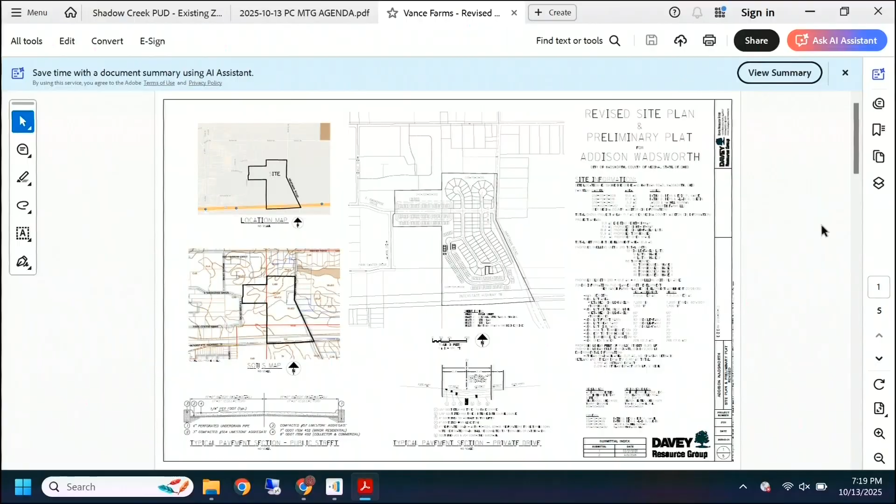The properties this is built on, most of them were in Wadsworth Township. That annexation has already occurred. Part of the property was already in the city. So this entire area was rezoned to Vance Farms PUD.

Action on the general development plan was tabled, as there were some issues that needed to be addressed, mainly with public utility extensions, routing and oversizing of various utilities, water line in particular, as well as improvements to the intersection of Smokerise Drive and Hartman Road. Those have since been addressed.

So just going over the general plan briefly, the project consists of 280 total dwelling sites, 92 single-family fee simple lots, 188 townhomes. All fee simple lots are greater than 7,800 square feet, which exceeds the minimum lot area specified in the pre-annexation agreement.

Overall project density is roughly 4.5 units an acre, less than the maximum 7 units an acre as outlined in the pre-annexation agreement. We've got about 28% of the site, or close to 18 acres, that will be common open space.

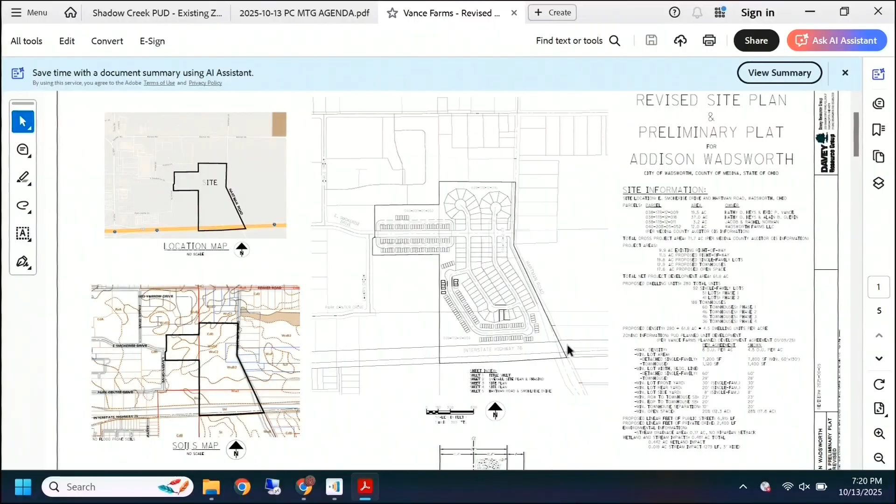Most of the streets will be built to public standards. There are 2 private drives that flank either side of Smokerise Drive Extension.

They're identified as private streets AA and BB. Those will provide access to the townhome units that are located in that particular vicinity.

So the general plan is very similar, if not identical, to the pre-annexation development plan. All proposed uses, densities, and open space requirements do comply with the PUD and the pre-annexation agreement.

So there were a couple of issues I'll bring up, but some have since been addressed. One question: the building envelopes for the townhouse units are roughly 30 by 50. Just need some clarification—do those represent the outer edges of the buildings, or will there be some yard area incorporated? For instance, the building might be 30 by 30 and have a 20-foot rear yard.

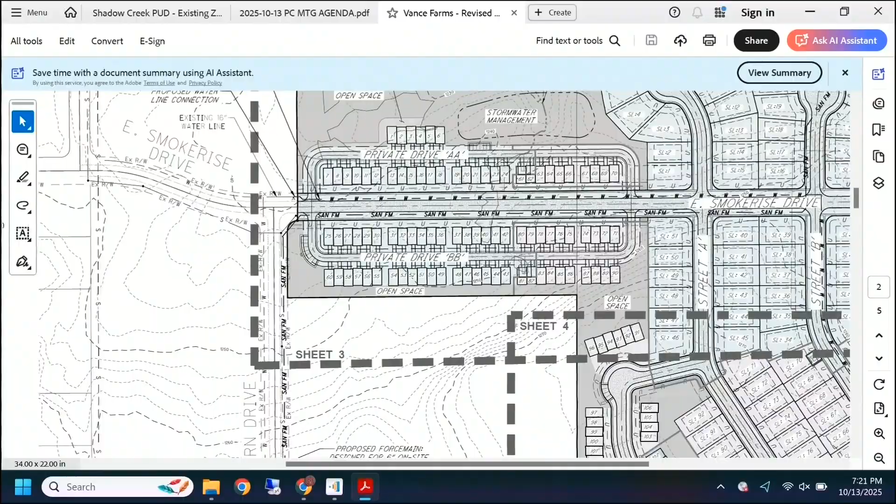Also, the townhouses, I think it was 7 through 42 and 61 through 90, flank either side of Smokerise Drive. My question was, are the fronts of those townhouses going to face Smokerise Drive, or would they be the rear of the buildings? I spoke to the applicant this morning.

They don't have a product where you can have a rear entry garage, so the rear of those units would face Smokerise Drive. I think it will need to go to the Architectural Design Committee for their review, to see what those rear walls look like. We'll also need to install some additional landscaping that the ADC will have to approve, to kind of soften that view. But I just found that out this morning.

Sanitary sewer, okay. The property slopes away to the northeast. There will be a lift station constructed. I think that was on page 3 of 5. Actually, it shows up here. You can see the pump station here in the northeast corner. That's going to route everything back down to a force main in Smoke Rise, and it will eventually connect to the gravity sewer in Laverne.

The force main is going to be oversized from 6 to 8 inches. The city engineer states that the oversizing is really not required by the city, so it's not subject to be reimbursed. Public water, on the other hand, a little different matter.

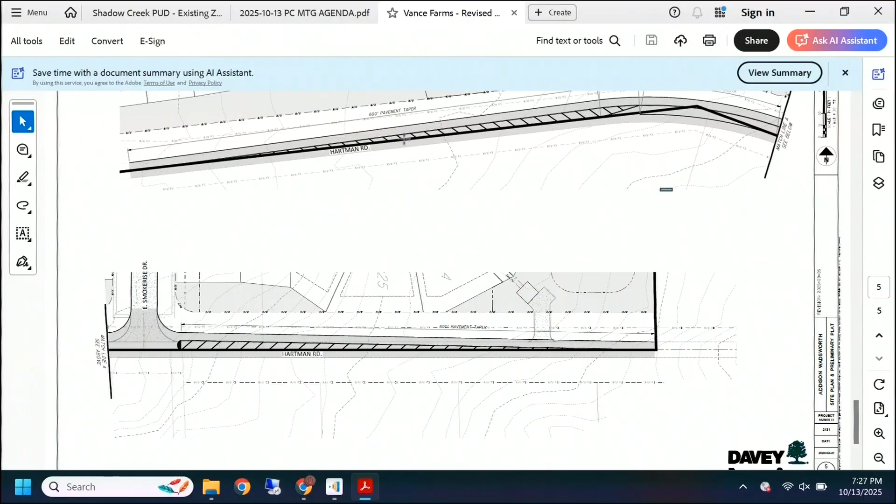The one that's further off-site to the west at Hinkle and Smoke Rise will be funded through some of the TIF agreements. Within the subdivision itself, there's some geometries here, I think it was on Street C. You can see we've got some bump outs and some tight turning elbows. Our engineering department indicated those might need to be reworked a little bit to make minimum turning radii, just to smooth out the traffic flow.

Also in terms, there are two cul-de-sacs here, neither of which require any variances. They're both less than 500 feet. I think I've noticed that certain traffic improvements and water improvements are eligible for reimbursement from the city.

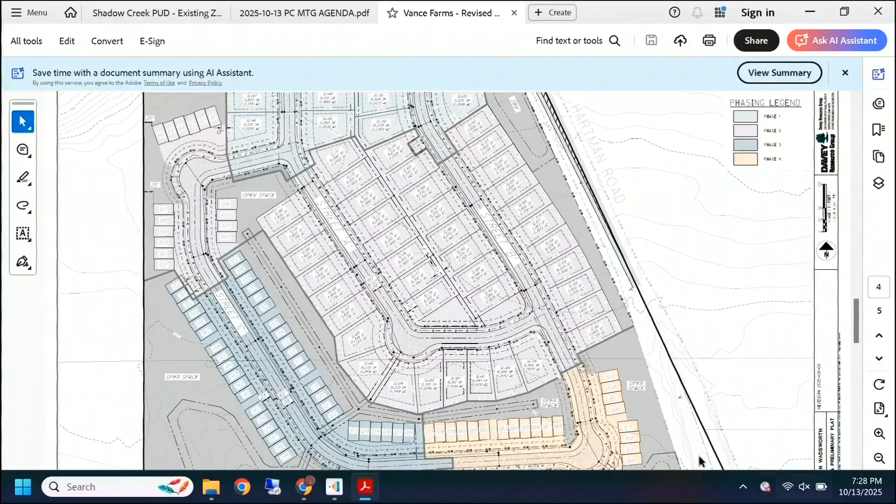In terms of the water line, again, coming in from the southwest, and instead of traveling up Hartman Road, it's going to cut into the development and come up Street B, where it then will tie into another 16-inch water line extension coming from Laverne Drive to the west. So it does complete a major water loop within the city's water system.

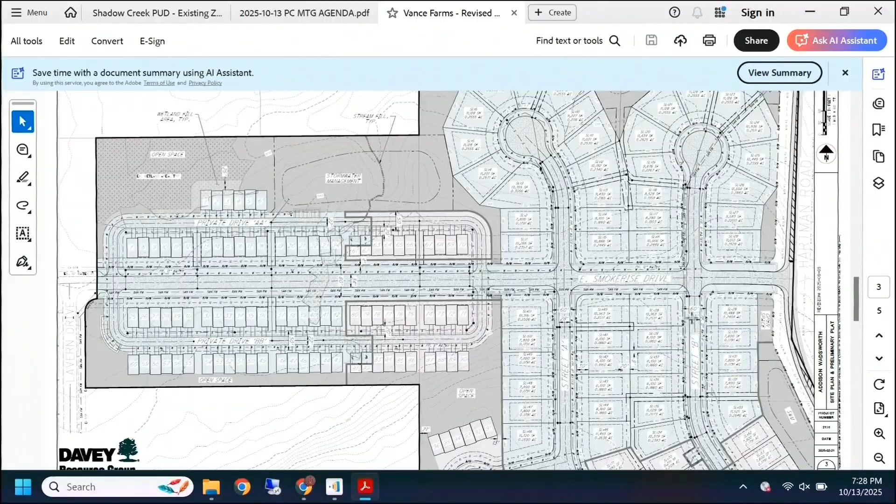And the reason they chose coming up Street B is, one, to keep from overburdening the developer with redundant expenses. If we took that 16-inch main up Hartman, they would have had to still build an 8-inch water line on Street B.

The lands in the township are already developed, so they're not going to be tying into the water. If they need to, they can easily do another stub that ties into Smoke Rise. It was felt it was more cost effective, more efficient, and less maintenance expense for the city in the long run by not having to maintain water lines that really are parallel - one on Hartman, which will rarely be tapped, and the one on Street B. So that one on Street B was oversized.

Oil and gas wells - I'm not sure how many are here on the property, but those will be abandoned and capped per ODNR requirements.

Also, a little clarification: there are some abandoned mines that impact this site. I believe a subsurface investigation was conducted. However, the potential builder who's going to buy these lots from the developers is going to have a full-blown geotech study done. Right now, the net results are that those mines are far enough down, they do not anticipate any issues. However, a full report will be turned in with their civil plan reviews. Like we'll be talking about in cases that involve underground mines - in fact, Briarthorn has some that they had to do mitigation to - there will be certain recommendations for disclosing the mine study and the fact that there are mines in the area, but referencing the geotech report as part of the HOA documents or as a freestanding document, so that any purchaser is given fair notice. Then it's really up to them whether they want to take a risk or not. So again, that issue is fairly well addressed.

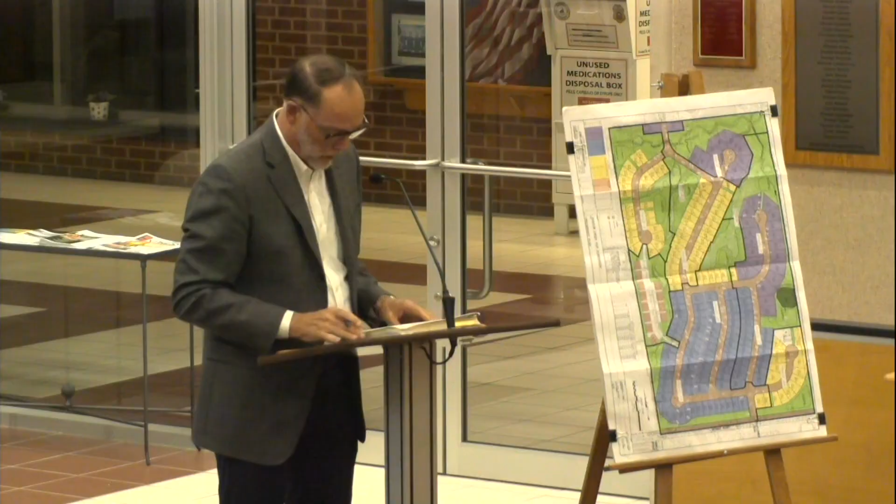I did want to make a couple of quick minor corrections. I did make an error on our application, as Jeff noted in his notes to you, and the net density is 2.92 units per acre, and that's what's shown on the plan. It's just dyslexic or something.

Also, the homes in yellow will be age-targeted, not age-restricted, but the requirements will be that they have a first floor master and that maintenance is included. So essentially that eliminates a lot of rigmarole with having basketball hoops and all that kind of stuff. Those homes will be primarily targeted towards people that want a maintenance-free or limited-maintenance lifestyle. The blue, as Jeff said, is more of a smaller single-family lot, and then the purple are the larger estate lots, which we've situated close to the common area or open space to maximize the value of those lots and also to follow that zoning hierarchy.

So what that means practically is there'll be a master association for the maintenance of the overall common space and stormwater ponds and stuff like that. But there will be sub-associations, and those sub-associations for the cluster homes will then be responsible for mowing the grass and plowing the snow and stuff like that. So just a quick clarification on that.

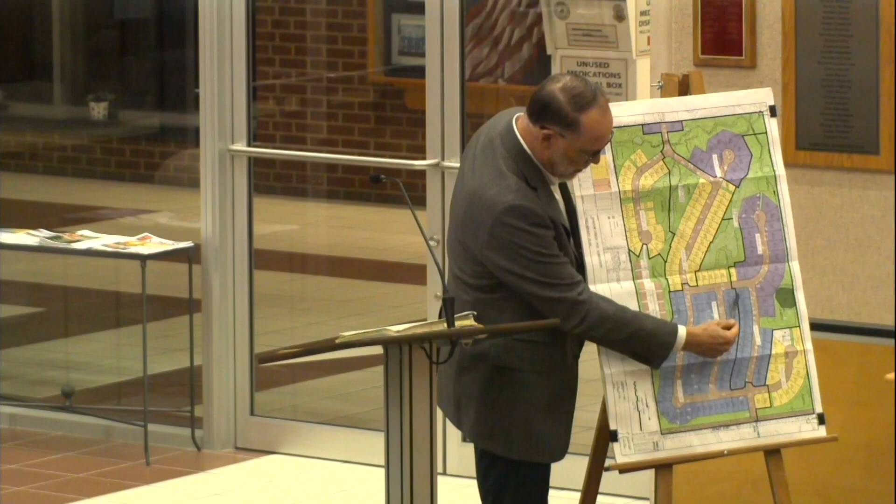The first is on corner lots like these, the desire is to limit the garage or the driveways to come to the front. So we situated those lots and asked for the setbacks to basically conform to that, so that the driveways come to the front and we don't get a bunch of driveways shooting off to the side.

Likewise, on some of these lots here, we drop back to a 35-foot setback, which is still within the requirements, but it's different than some of the other lots. Again, the reasoning is those are cluster lots — there's going to be maintenance, we don't want a super large lot. There can't be basketball hoops and trampolines; it's not really that kind of thing. So there won't be any accessory structures. We think that's appropriate for what we're trying to do.

And again, I want to thank you all very much for all the hard work, for your team, the city that represents you well, and I will certainly stand for any questions after public comments. Thank you. All right, thank you.

Or if you have any questions. Don't think so at this time. Okay, thank you. All right, now I'm going to open the public hearing.

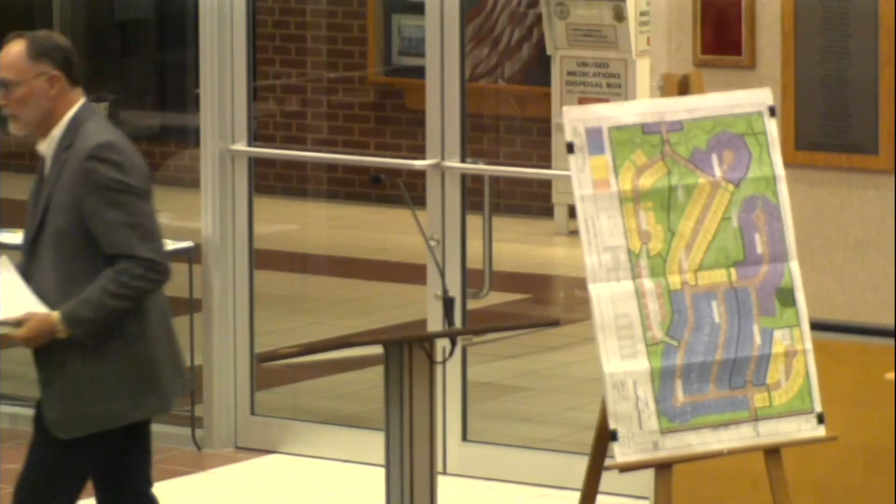I have two people who signed in as opponents. I will call on them, and if anyone else in the audience wishes to address the Planning Commission, come forward to the podium afterward and give us your name and address.

Good evening. Terry Lataki, 1447 Shepperton Drive, and yes, I am at the end of the road. So I have a little concern about there being no buffer zone.

The two lots they have at the end of Shepperton look like they belong to Tiburon more than to Shadow Creek. You can see the big spacing they developed around that whole area. We don't understand why those lots need to be there when more of a buffer zone all the way around would be better. I know the church is going to address this also.

The other concern is traffic. As Jeff said, yes, there may be some Tiburon residents going through, but we're more concerned that with the layout of that bottom road, the majority of people are going to come through our development to head north, more than going to Reimer to go north, because of the lack of the circle a lot of us are looking forward to.

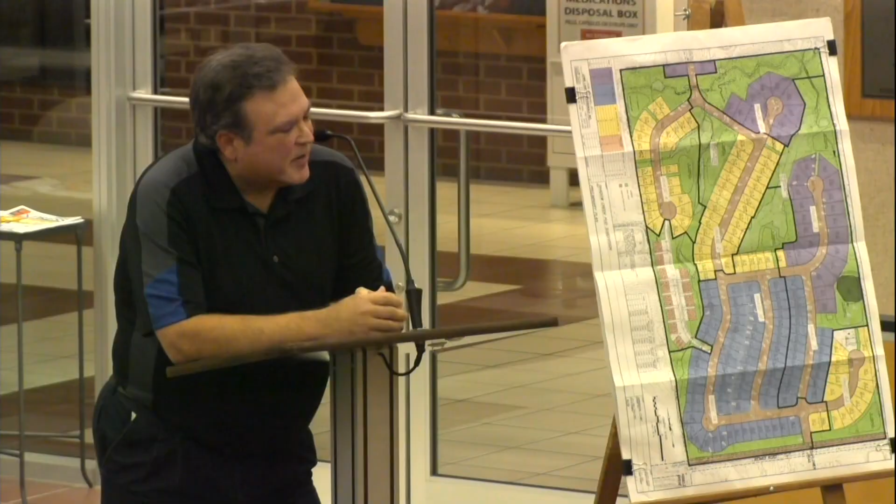Okay, thank you. The other name I have is Gary Kissling.

Good evening. I'm sorry, your name and address for the record.

My name is Gary Kissling. I'm here on behalf of the chapel in Wadsworth that sits on 1391 State Road. We're an adjoining landowner just to the west of this development. Thank you.

I have to apologize, I've been to the doctor but I'm still not well, so I'm losing my voice and I've lost my hearing. So please speak up if you have to ask me a question.

Yes, our concerns are primarily the existence of the PUD, the common areas, the lots adjacent to our property, and traffic and sewer, I think, is something you need to consider on this. But as an adjoining landowner, that's not something we're really concerned about other than if it affects our sewers.

About 2 years ago, there was a move to annex this property and request that it be R1 and R2. Now 2 years later, they're asking that it be a PUD, and I understand that's a growing trend. The basis behind the PUD, as I understand it, is to provide more homes for people.

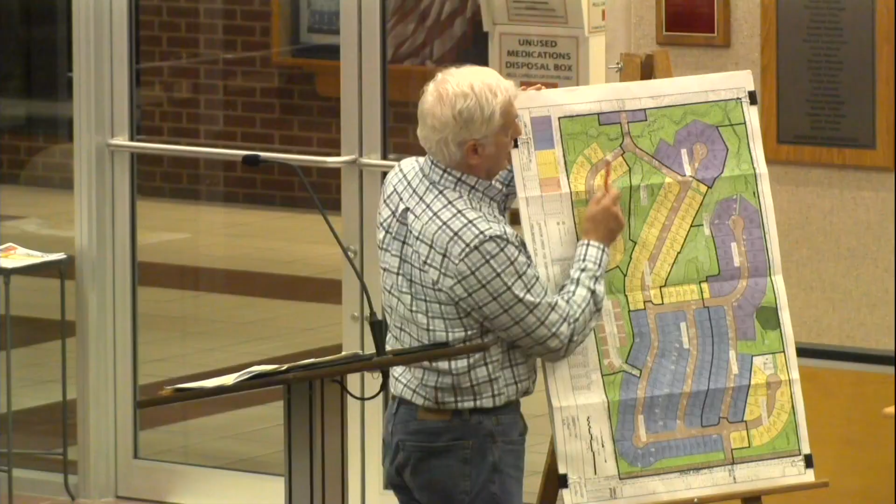But if you take out the catch basins for all the stormwater, I don't think they're up to the amount. I'm not an engineer, so I can't figure the size of each catch basin, but if you look at the diagram, the wetlands compose about half of all the green space they have, and the catch basins appear to be about a quarter of the green space of everything they have.

So we're concerned about that. There's a lack of common space here, which is supposed to be provided to accommodate the fact that they're putting in more dense housing. I noticed also phase 5 involves 3-family dwellings.

They're townhouses, but they're stuck together, so 3 of them. Under the zoning ordinances, that qualifies as a 3-family dwelling. And for R1, they're only allowed to have a 2-family dwelling.

Getting to the clustered homes that adjoin our property - I think I spoke about the trees a couple of years ago. Is this all forest? We preserved ours, we have a walking trail in there. Anybody can use it, we don't care. We give access to all of our neighbors to that.

We don't have a trail adjoining here. If they would like it, we could do that. Our concern is these homes are abutting our property.

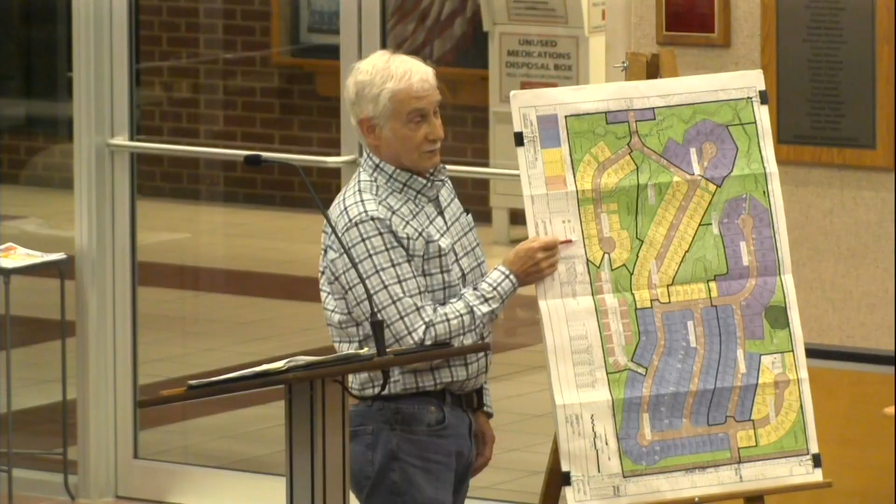Typically, what I've got some experience with - another PUD that adjoins has common spaces that are woods. And what happens is people dump their grass clippings, their leaves, and some of their trash and compost into the woods. And the woods will be dumping it, and it's going to be our woods.

It's not just an aesthetic matter, it attracts rodents, which is a health problem for the people living here. It's a tree and vegetation problem for us too, because when you dump compost, grass clippings and leaves into a forest in big piles, the nitrogen content of the soil rises to a level that can kill the trees, and it kills the surrounding bushes also.

So they haven't designed it so their residents would dump stuff in our woods, but human nature being what it is, that's what's going to happen. A buffer - if they had a buffer full of trees here, they could dump it in their own trees and not ours. Is there anything we could do about that?

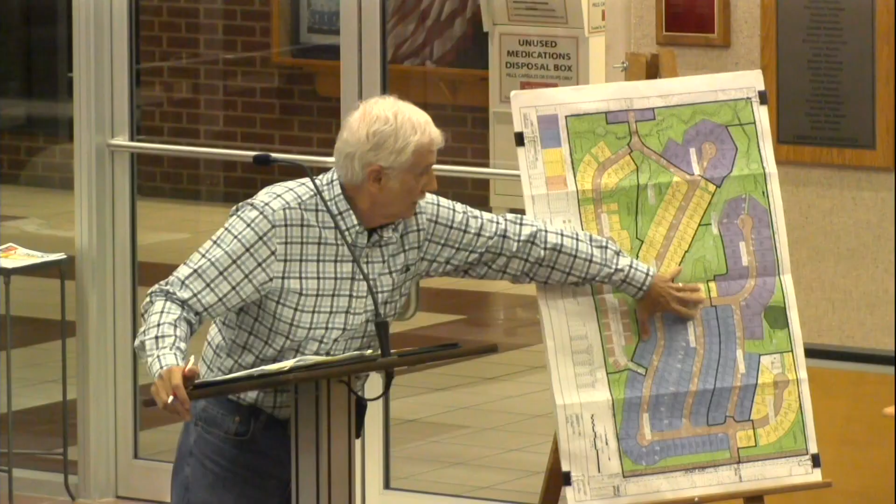But those are the main concerns that we have. I would just ask you really look at that carefully in terms of, is there adequate open space here for these people? Because this was LDR and R1, and that's what it is now. The city is giving up that low-density housing for this more crowded housing, and there should be adequate green space being provided by the developer to make up for it.

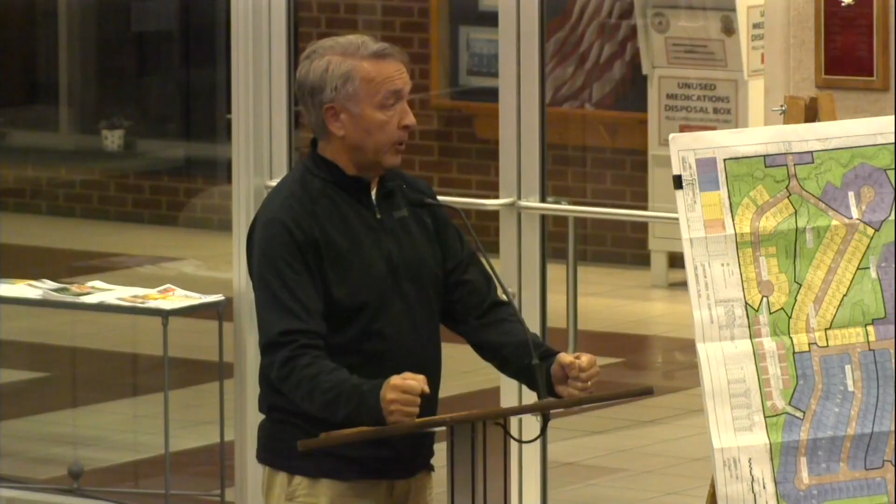My name was on the list, but I scratched it out because I got confused. My name, again, for the record, is Michael Purpura. I reside at 1134 Partridge Drive in Wadsworth. I work for a major utility, AT&T.

At AT&T for about 12 years, I was considered the SME, subject matter expert, for work area protection for all of AT&T across 50 states. I dealt with road traffic for years. Luckily, now I have a new job and my blood pressure has dropped. In that time at AT&T, I have seen crazy stuff.

I served as expert witness, I've been deposed, all of that with placement of utilities. The pole's too close to the intersection, somebody hit it, we're dragged into court - Michael, what do you think? I get deposed, I go through all of that.

Sitting in this meeting this evening, there are 3 developments under consideration by this commission. I'm not saying yes or no, whatever - it's your decision, you have a big decision. Citizens of Wadsworth believe in you, elected officials, appointed officials, you've got a job to do. But at the end of the day, all of that development at that end of town is a recipe for disaster. There is no conceivable way, with the roads being what they are now today, that it will be handled.

We can talk about turn lanes. I can tell you turn lanes don't work. It creates more of an aggravation and rear-end collision situation, especially when they're on curves. That infrastructure on Reimer Road has been that way since I've been coming here as a kid.

It hasn't changed, it's still 2 lanes. You've got a stop sign down there at Hartman. It's not going to work. There's no way it can handle the traffic, even with the churches in the area, and everybody should go to church.

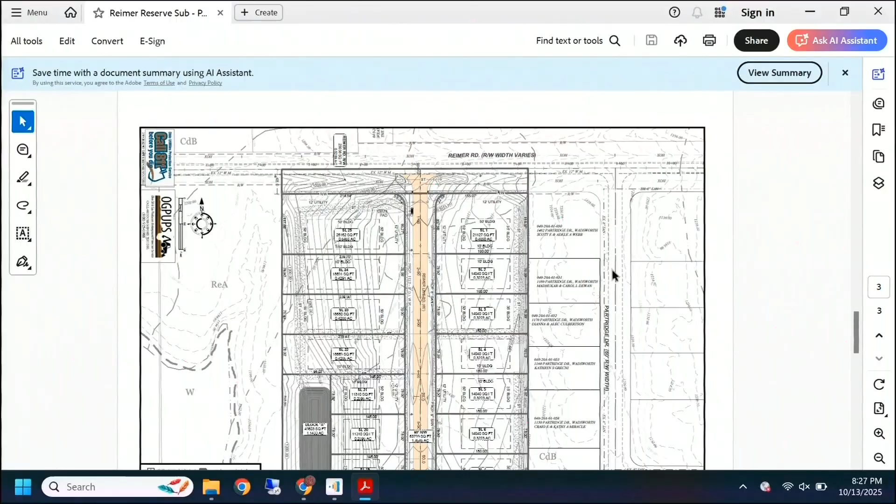In terms of sanitary sewer for the development, there are two options, and I don't think the applicant has made a decision on either option at this point, although I think they're leaning towards option number 2. Option 1 would be to install a lift station, which would pump sewage back up to the gravity main in Reimer Road, and then would fall to the east and follow the sanitary sewer system, eventually heading, I believe, to Great Oaks Trail and then down south of the highway to the sewage treatment plant.

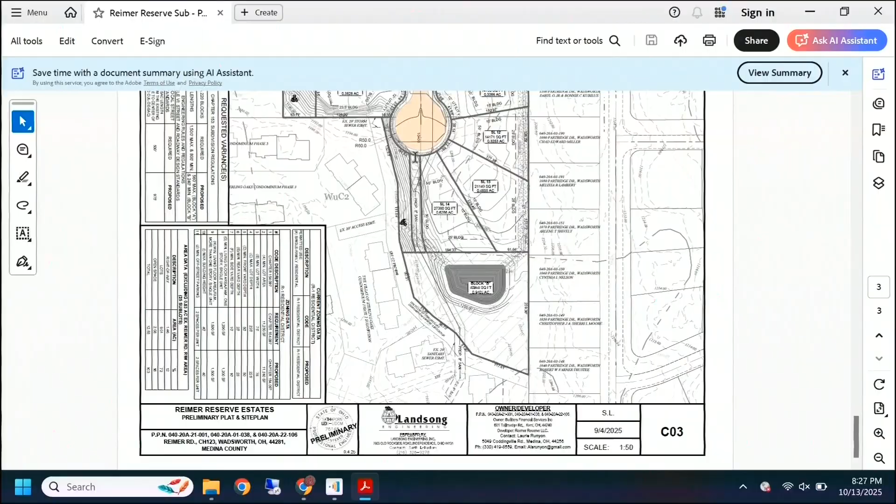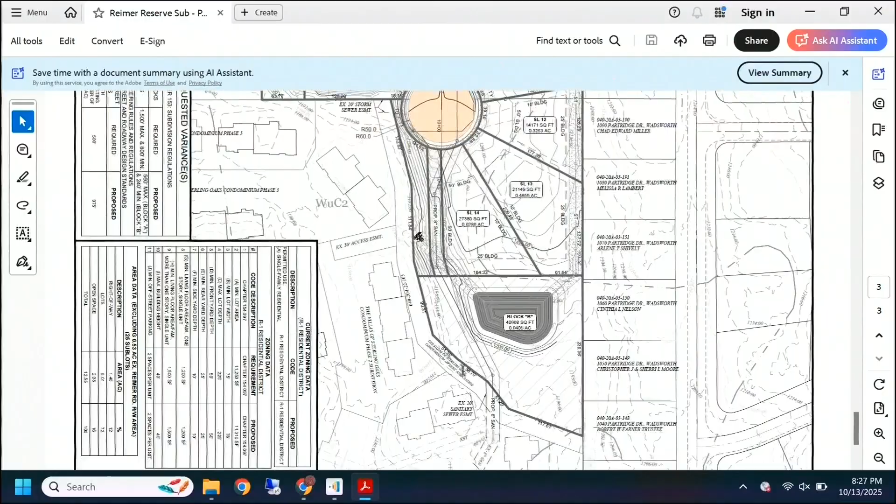The other, shorter option is to work with the neighboring property owners to the south, the Sterling Oaks Villas, because they have a private sanitary sewer within 50, 60 feet of the south property line. That sanitary line could be gravity fed across sublot 14 through block B and connect with their system, and it ultimately heads south to Great Oaks Trail and ties in where the route from the north would come. So they all end up in the same location, just coming from different directions.

I think the second option is probably the most cost-effective - the applicant can discuss that. And again, I mentioned the stormwater basins are proposed on blocks A and B. The basins naturally drain to the south and west.

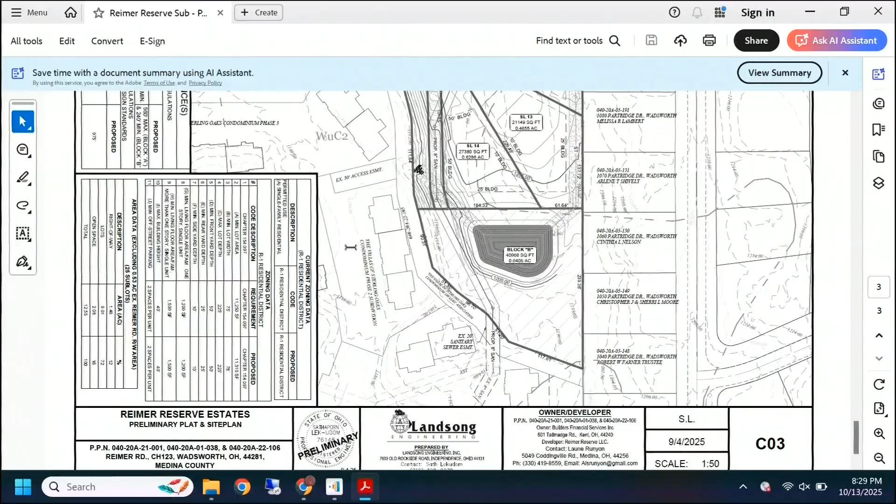What was indicated is the applicant may need to acquire easements from the neighboring property owners, basically Sterling Oaks Villas, and that really depends on how they manage the stormwater systems. If they're going to increase the rate of discharge from this property, they would need some agreements to release runoff faster than pre-development flows. If they oversize the basins and discharge at the same rate as it discharges now, those easements aren't needed. That's mainly a technical issue, and engineering is aware of that, and it would have to be addressed as part of their review.

For the rest of this report, I'm going to spend a lot of time on the abandoned coal mines. We are aware that there are coal mines that affect this lot, as they affect many of the lots in the general vicinity. So let me pull this up - I've got a few maps in here.

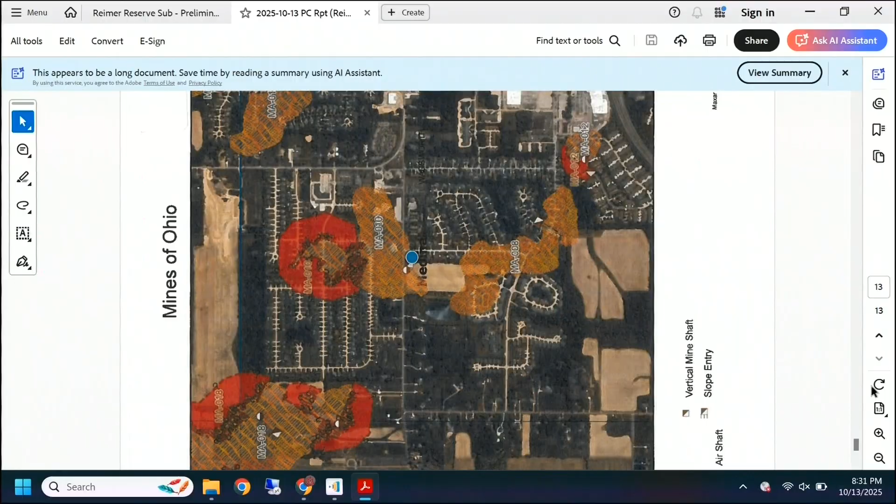Again, this map is also in the geotech report, and it just shows the existing mines in the general vicinity. We can see that the central part of Weatherstone is under mines, with some mines to the south affecting part of Weatherstone as well as the Weatherstone Park area. Looks like it's the same potential seam that's hitting the north end of this site.

To the south, you can see that that particular mine area also affects pretty much the southern half of Partridge Drive, and some of the sites along Great Oaks Trail, as well as another potential impact near the Deepwood and Great Oaks condos. So again, this development's not a whole lot different than other things that have been developed in this area.

And I think, again, it could be platted and create building sites incorporating the geotech report's or that geotech engineer's recommendations for stabilization. Again, the other option would be a cluster-style development.

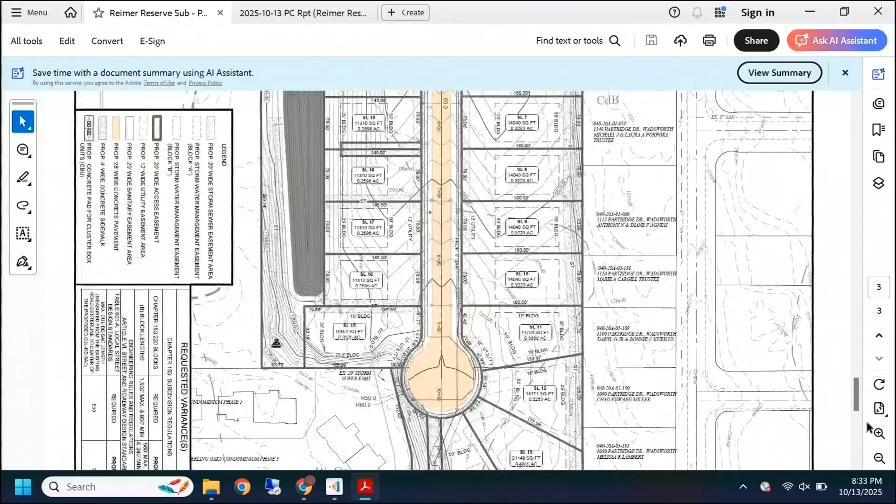But regarding these mine issues, they were looked at in detail by not only us but our engineering staff. Assuming the applicant wants to stick with this particular development pattern, the standard subdivision, they recommended a few activities that should be taken and when those activities should be taken. So prior to civil plan approval, the applicant would need to obtain a written opinion from the geotech engineer.

As to whether additional investigation and stabilization measures are warranted. If additional measures are warranted, that statement should include a time frame, what needs to be done and when.

Prior to construction, the geotech engineer should acknowledge that the infrastructure design for the subdivision—streets, utilities—included any mine stabilization and other measures deemed necessary to meet ODNR's reasonably safe standard for residential development. And that acknowledgement should be approved by the city engineer.

So they need to explain what they found, what was done, why it was done, or if nothing was done at a particular site or location, why not—what's the rationale there? And then post-construction, before final plat approval, basically the stabilization measures deemed warranted need to be undertaken.

The geotech engineer needs to basically sign off, certifying that those measures were taken, and that it complies with ODNR standards for reasonably safe for residential development.

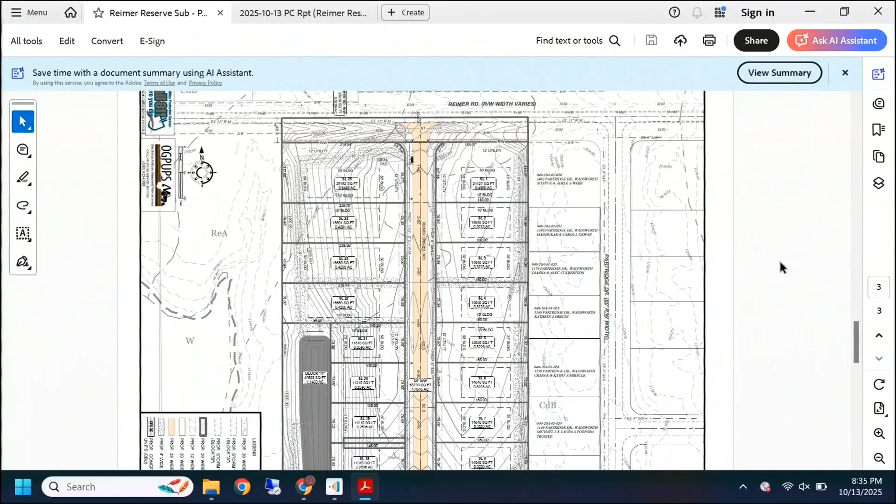Again, I think there was some comment made earlier that we need a 100% guarantee that it's going to be safe. Well, that can't be done. Occasionally we have these issues, but no one is going to certify that everything's 100% safe. Even ODNR's suggested standard is what they deem reasonably safe.

A few other site plan issues: this drawing's not too—the larger drawing gets a little confusing. The applicant needs to use some different line weights to distinguish between lot lines, various utilities, grading, etc., as well as some easements. So there are a couple of oddball things.

Like this area between sublots 18 and 19—I'm not sure what that means, what that's supposed to represent. Same here on lot 14: there looks like there's a proposed sanitary easement, but they're using the same line weights as the property lines, so I don't know whether that easement is on sublot 14, bisects sublot 14, or whether some of the area to the west is one of the open space blocks.

Again, I think we also need to add some dimensional requirements to make sure that all of the lots meet zoning requirements. Any public utility outside of a public right-of-way needs to be within an easement, and I think they are showing that, but again, need some clarification and consistency as to how those are identified.

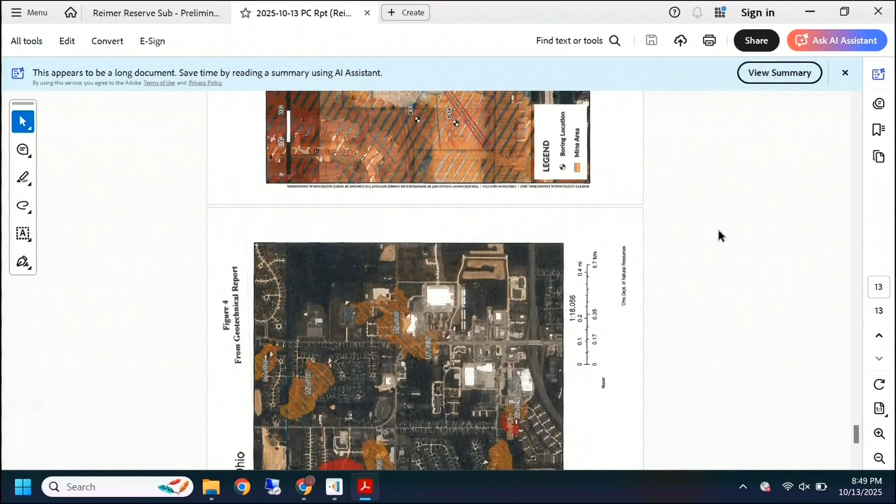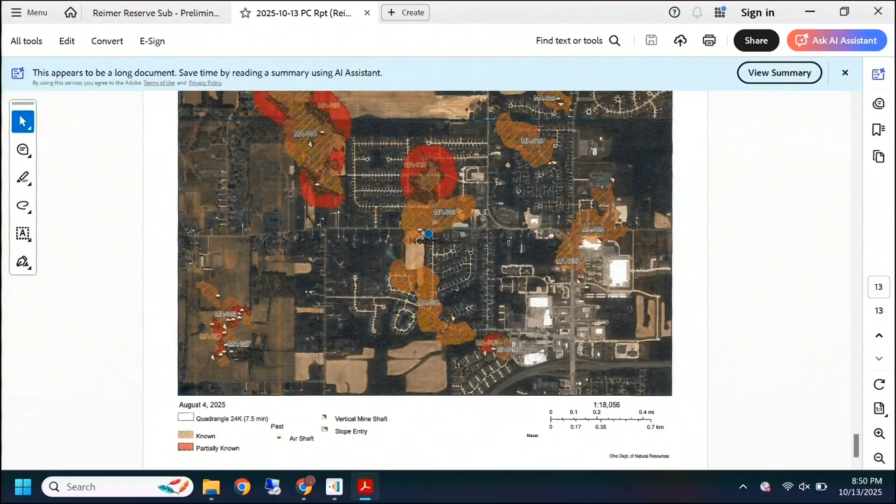Whoops, I forget this, I got to get out of here and get rid of that. Yeah, so again, some of the lots are impacted, some are not. The existing neighborhoods, more homes there are impacted than what would be in this particular project. Again, with this scale it's hard to see, but you can see that the southern half of Partridge is impacted.

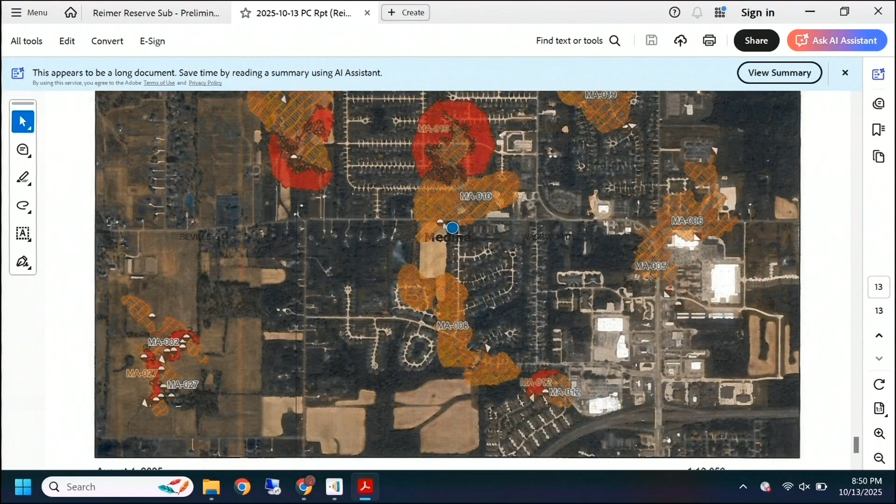Swath of Great Oaks Trail. And again, we already know about some of these up here, and I believe, and this map doesn't go far enough, but I believe, oh yes it does. So this is the Northwoods development, I do believe. So there are some mines in that area.

So I guess the point is, encountering mines is not unusual in this part of Ohio. What we can do is be aware of them. There may be some that really aren't suitable for development, but most of them, there are mitigation techniques available, again at a cost, and that's something the developer and their engineer need to review. Is the cost of mitigation going to negate the ability to sell the lot? If so, then they may need to come up with a revised plan.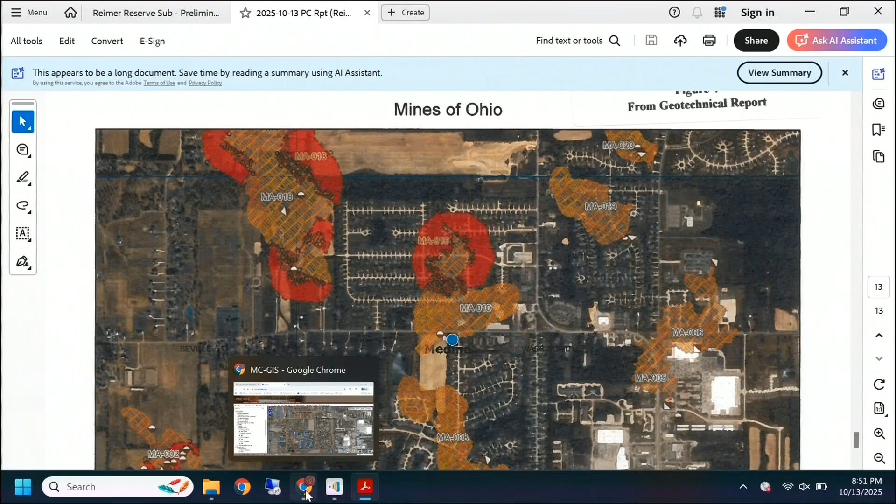Any other comments, Mr. Kaiser? No, that's it, but I think, again, maybe worth tabling and getting some additional feedback from the city engineer. Because I fear that we're kind of venturing off into areas that are sort of outside of our purview. Well, we go through a process, and that's why we have other agencies review it, to make sure that the development is reasonably safe. But when we extend into areas that are not regulated by the city but by other agencies and turn it down for those reasons, I think we're on a slippery slope.

Well, I think we should table this and get some more comments from our engineering department about the issues raised in this evening's meeting, plus, if the applicant has any additional feedback from the work the geotech is still doing. Yes, yes, we'd like to see that. If those additional studies have been done, then we should know about those too.

All right, is there a motion to table? Mr. Chairman, I move that we table dealing with the Reimer Reserve subdivision. Second. Okay, second. Good enough. Heard the motion and second. Any further discussion? All those in favor of the motion say aye. Aye. I said aye. You heard me, right? Must have said it at the same time. Yeah, it was at the same time. Motion carries. Mr. Kaiser, any other business for this meeting this evening?